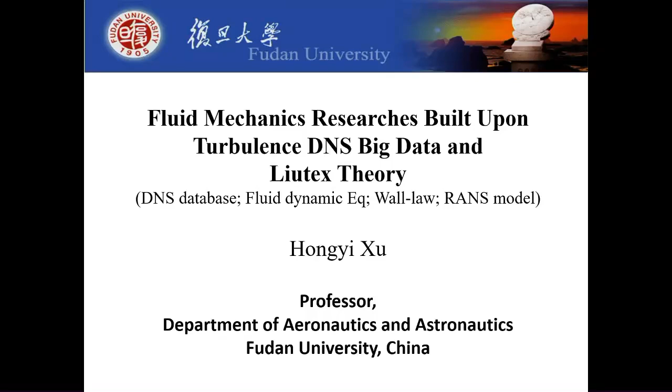So what I want to present here is basically 4 topics. First, we built a very large-scale turbulence DNS database, and the rest of the 3 components of research are basically supported by this turbulence database.

Giving you some background on the research: as we know, we're getting into the AI era, which has fundamentally changed our way of doing research. Science big data is at the foundation of these AI for science campaigns.

So we will see a lot of strong interactions between AI and what I would call BI, basically brain intelligence. Mostly BI accomplishes the 0-to-1 tasks, and AI will quickly push it from 1 to 10, and even 10 to 100.

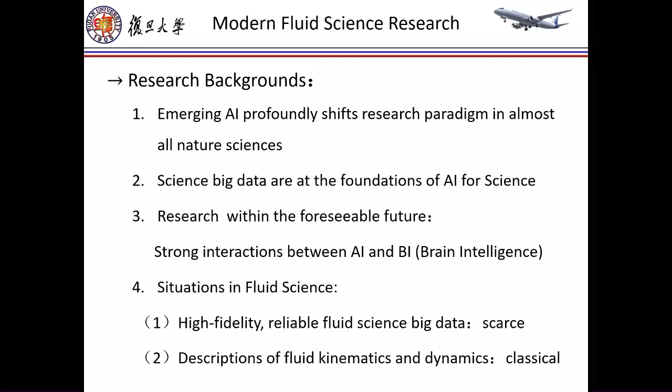Within the scenario of fluid science, we are very scarce of reliable science big data. And the second thing is our theoretical framework still stays very classical. Basically our fluid ancestors laid out this framework for us.

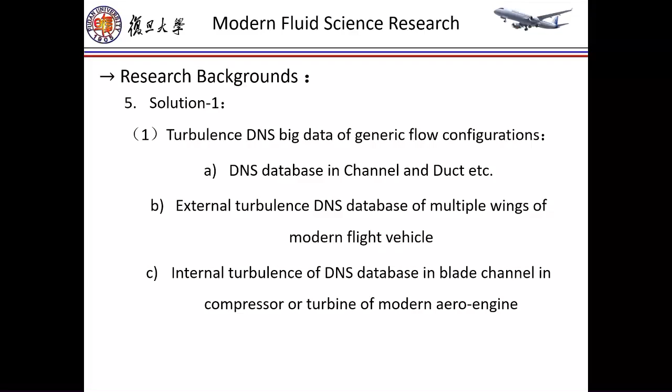So our solution 1 is to build very big science data. This data includes a fundamental flow configuration for channels, ducts, etc. And we quickly push these things into a multi-wing representative type of aerospace external flows, and the internal turbulence inside the blade channel in a compressor or turbine.

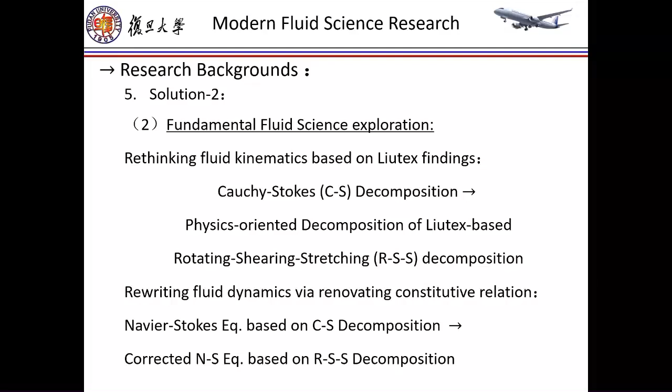The second solution is basically from 0 to 1, which is inspired by Professor Liu's Liutex. Basically we rethink and revisit the kinematic part of fluid mechanics, from Cauchy-Stokes to the triple decomposition. By doing this, we revisit the constitutive relation and rewrite the fluid dynamics equation, basically the Navier-Stokes equation. We call these the corrected Navier-Stokes equations.

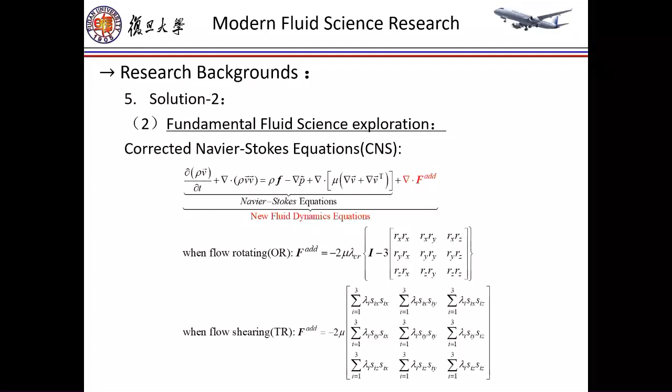So this is our corrected Navier-Stokes equation. Basically it's corrected by these extra tensors. I'm going to give details later.

So the second part of research, which we call the 1-to-10 type of research, is the wall law development. In this part, we first follow the footprint of von Karman's law of the wall, and further push it to the universal wall law models. I'm going to give details for wall-bounded turbulence.

We try to apply this wall law model to type A, which is basically flat plate turbulence. We got law representations for the entire turbulence boundary layers, not just the semi-log and the viscous linear regions. Then the next objective is to try to push these wall law relations to the separation regions.

This is really a breakthrough made possible by using Liutex theory. Maybe I'm going to give my ideas on this later on.

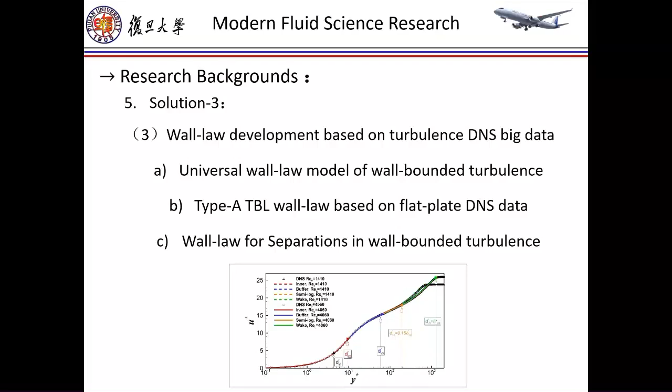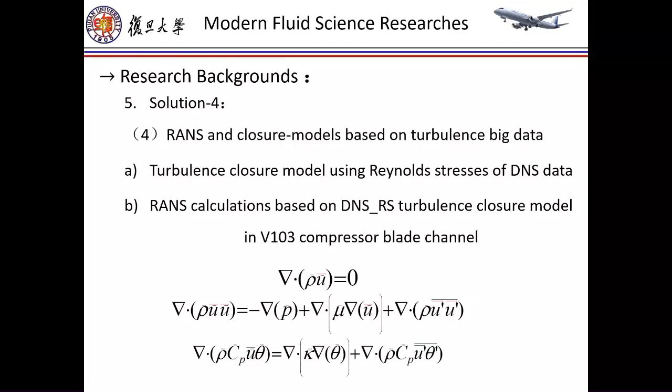The third part is we try to address industrial concerns by renovating the RANS closure model using our DNS database. Basically we insert the Reynolds stress as a source term to close the RANS model and solve the mean flow field.

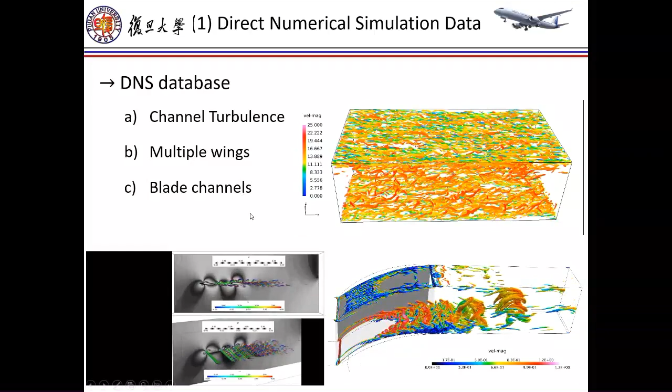On this side, you can see the evolution of the lift coefficient and the drag coefficient with the changing turbulent flow on the airfoils. So this basically gives you the general idea of our database.

Once we got this data built, we started to dig into the fluid dynamics side. For the kinematic side, I don't need to go into details because Professor Liu already did that part very well.

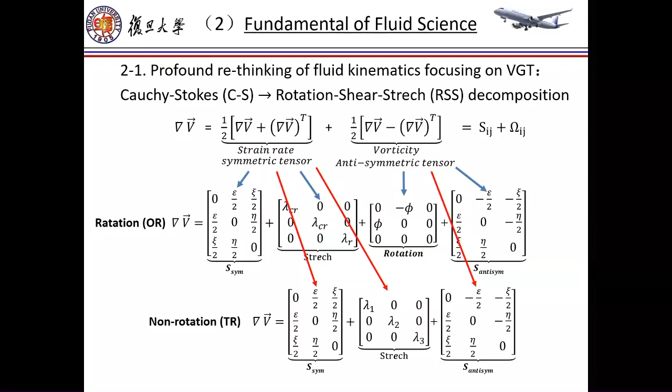Basically, I would like to comment that Liutex theory allows us to go from the Cauchy-Stokes level of decomposition into one more level, to a more fundamental kinematics, like very pure types of motion: shearing, stretching, and rotation. So now we know this very well.

The next thing we want to do is the flow dynamics, to see whether this decomposition can give us some new ideas in dynamic development. So when touching on the topic of flow dynamics, the first thing we think of is the constitutive relation, right?

It is very legitimate for Stokes to include the shear deformation into the constitutive equation based on this very classical fluid experiment done by Newton. It's called Newton's friction law.

But however, when we consider if these components need to go into the current Newtonian fluid constitutive relations, we cannot find any experimental support on this for over 200 years.

We did a lot of search on this part, and the only reason this part goes into the constitutive relations is because Stokes makes the isotropic assumption, which basically means the stretching motions are performed exactly as the shear motions. So whether this assumption is legitimate or not is a very, very big question.

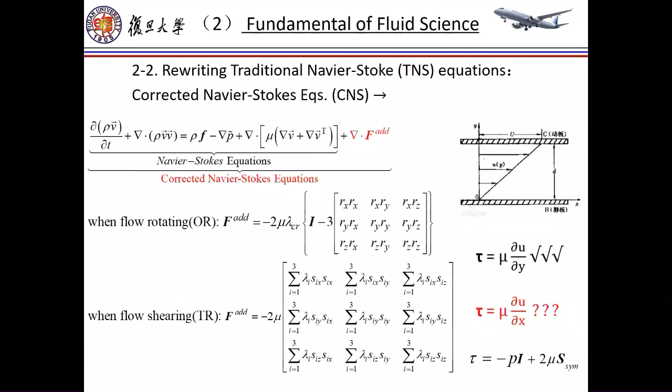So this is very simple. Blue color... oh sorry, how to go back? The blue color means 1 real, and the red color means 3 real. Here, the left side is the corrected Navier-Stokes. The right side is the traditional Navier-Stokes. We can see some structural difference

between these 2 equations. That means we have some large-scale differences. Then we can see basically this 1 real and 3 real are equally important because they almost occupy half and half of the fully developed regions. So that is just a qualitative

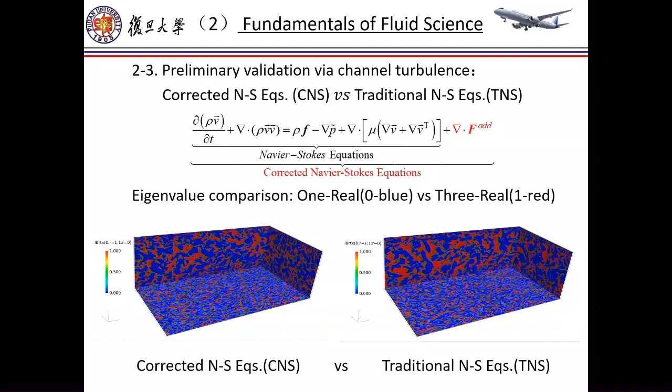observation. Now we get to the quantitative. We take the statistics of Reynolds stress and the mean flow field from this channel flow.

And then we can see, we use the Moser and Lee data. He gives very accurate channel data. This green one is Moser. And here we have our Navier-Stokes, traditional Navier-Stokes, as the blue dot.

And the red colors are the corrected Navier-Stokes. And as you can see, our data, the corrected Navier-Stokes, gives a solution consistently approaching the more accurate DNS data. That means our correction is at least on the right track towards the real solutions.

Another comment is our corrected NS data gives exactly the von Karman constant. This is very commonly accepted.

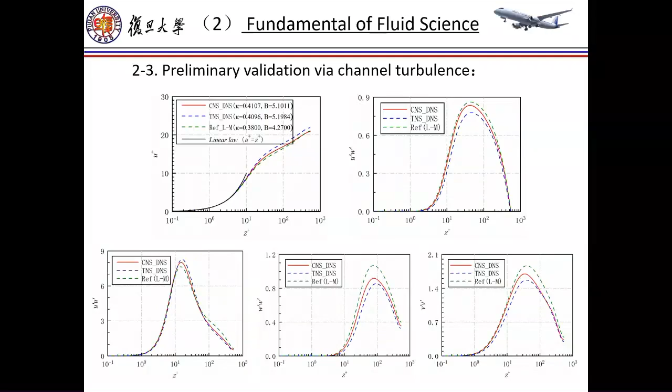And here, Moser's data tends to give a lower von Karman constant, which probably is associated with the inclusion of the normal stress terms. So that's our guess at this moment.

Okay, that's the first part. The second part is the universal wall-law model. For this part, we basically follow the footprint from von Karman.

He used the so-called local frictional velocity scale to develop this law of the wall. Here, we introduce the so-called ensemble averaged frictional velocity scales. By using these scales and the associated length scale and time scale, we renormalize the Navier-Stokes equation, we can find suddenly this equation has no Reynolds number.

There is no Prandtl number. So that means the dimension of the solution of this equation has been significantly reduced from four to just space and time. So this is very promising, I would say.

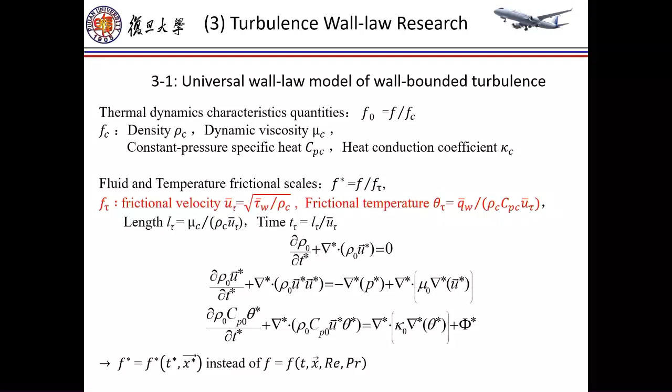We apply this model to the flat plate, as you can see here. We are not the first using this indicator function. People in the DNS community have used this just for the semi-log region, and we push this back into the more near-wall layer.

We use this function to quantitatively define the so-called turbulent sublayers. We identify the point where the second derivative is zero as the viscous linear layer, and the point where the first order derivative is zero as the inner layer. Then we define the entire sublayer.

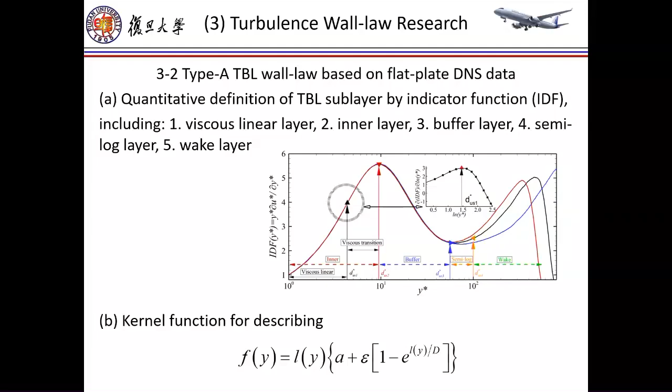We find a kernel function, which is very important in restoring the analytic solution of the velocity profile. This is the form of the kernel function, which is basically a Van Driest damping function. By using this Van Driest damping function on these different layers, we recover the entire turbulent boundary layer analytically.

In different sublayers, these are the analytical solution expressions for different sublayers. Even more than that, once we recover the profile for the U component, we use the same idea for the V velocity that is perpendicular to the wall.

Again, we try to find two indicator functions and then define each turbulent sublayer for the V velocity, and then use the kernel functions to recover these turbulent velocities. So basically, for flat wall turbulent boundary layer, we find the complete wall law for this type of TBL.

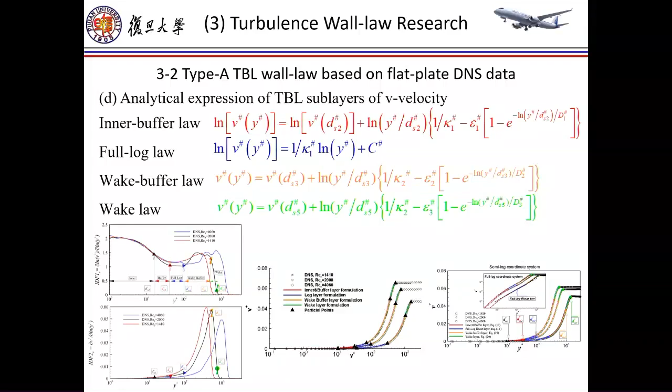Okay, now let's go back to the models. We see why this is a universal wall law, because this is directly based on the Navier-Stokes equation. So it has no restriction to turbulent boundary layer. We can push it even further to separating flows, right?

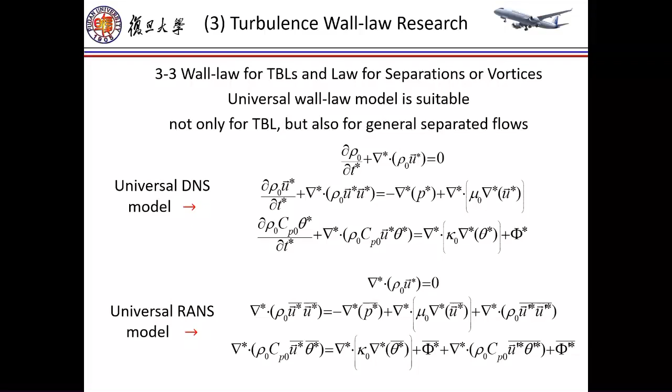Then, as you can see, by the conventional turbulent boundary layer analysis, we use the shape factor to exactly recover the transition point. That's the paper we published in the Journal of Turbomachinery recently. And here is on the pressure side.

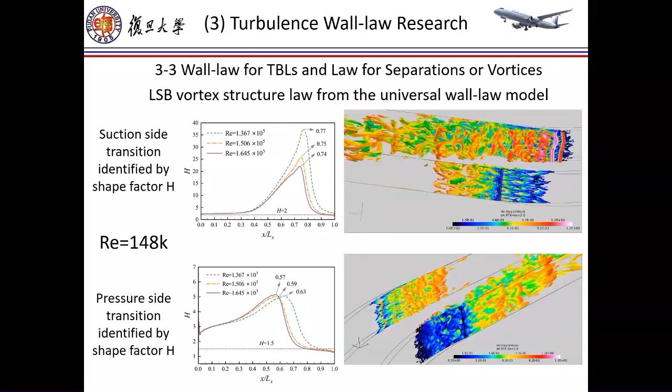Therefore, you can see a lot of details. Then we go into these data, we find there's a very distinctive phenomenon in this compressor blade channel, which we call laminar separation bubble, LSB.

And because we have big data, we have different Reynolds numbers. You can see these LSB occupy different zones. But if we use the so-called frictional velocity scale to rescale these data, it is very promising. We can find a universal structure for this LSB.

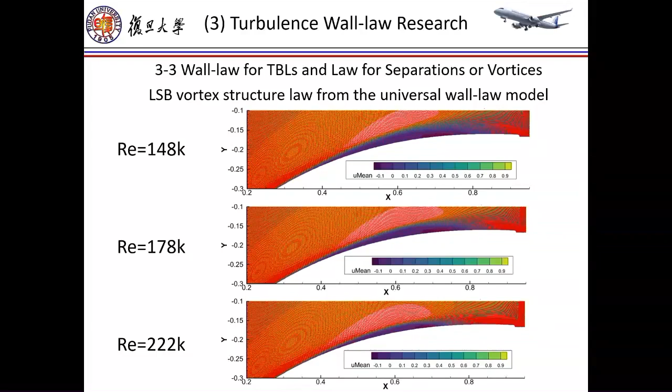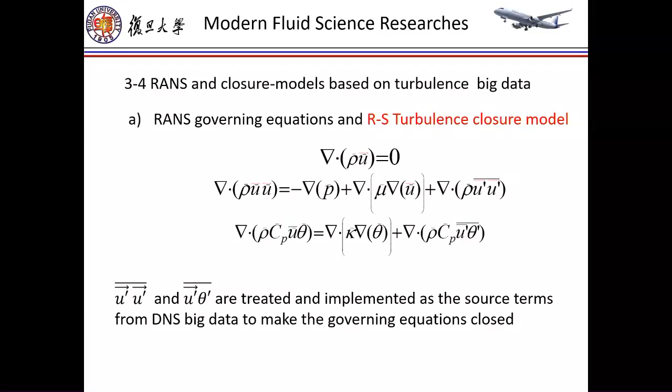That's our next plan. So now, getting to the point of industrial application. We know in industrial application, the central issue is the turbulence closure model, right? So now we try to use the DNS statistics of Reynolds stress and insert this as a source term to close this equation. By solving this closed equation, we can get a very accurate averaged flow in the Reynolds averaged sense.

That is, you can see, we try this for the square annular duct. We use these Reynolds stress models to close this equation and then recover the mean flows with the very distinctive turbulence-driven secondary flow.

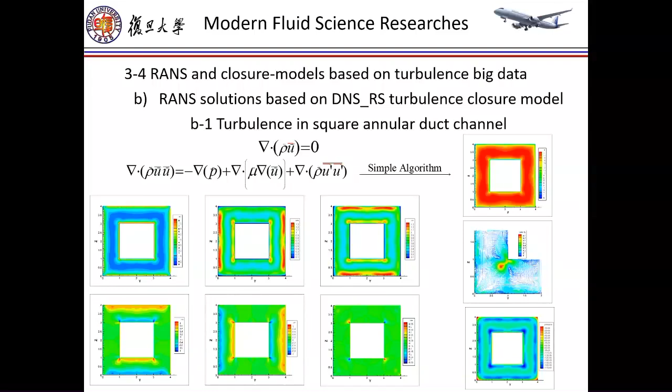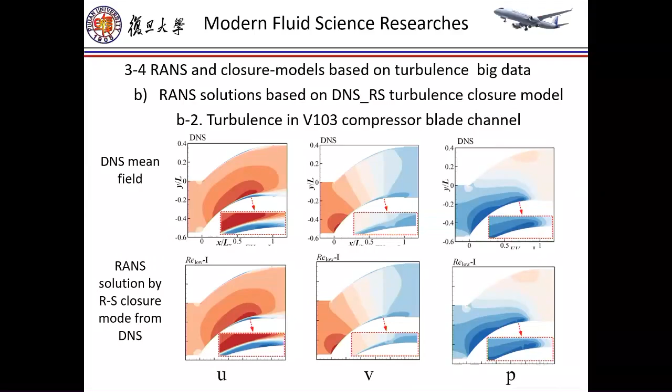Also, we pushed it into the industrial application. That is, we try the compressor blade. This is the Reynolds averaged solution part.

So with all this being said, I reach the conclusion of my presentation. I do not need to reread it. I would be very happy to share the relevant references with you if you are interested. Thank you.